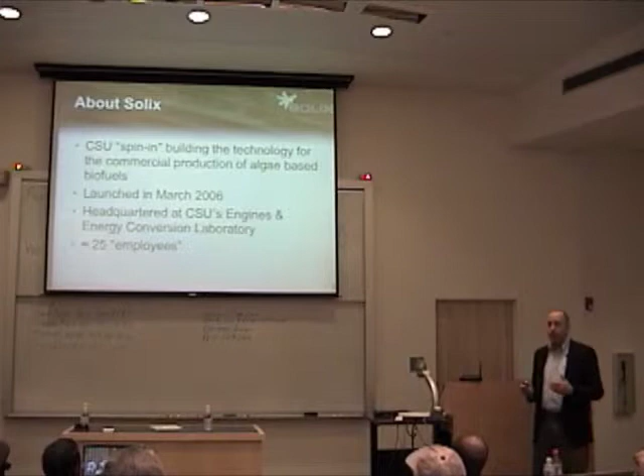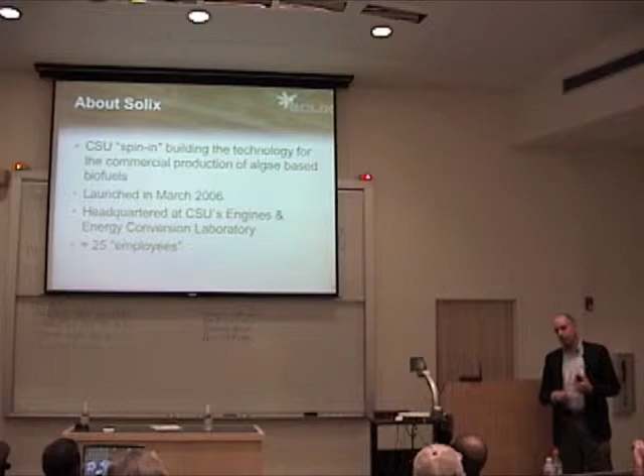A little bit about Solix. March of '06 was essentially when we began our operations. We're a private company, private equity funded. Developed our first generation technology, which I'll show you a picture of, during the course of last summer. And then since September of last year, I've been developing our second generation technology from what we learned.

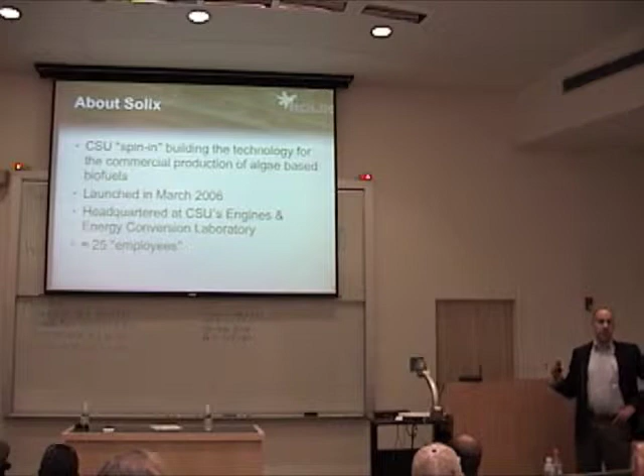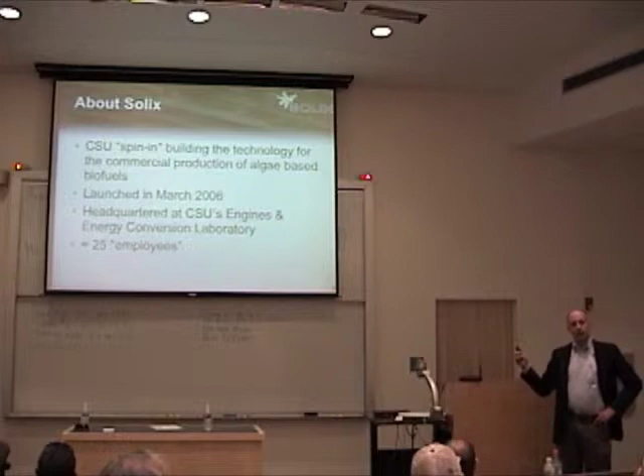We're about 25 people. Half of those are Solix employees, the other half are Colorado State University graduate students, professors, so on and so forth that we've got working on it. We're working in collaboration with CSU out of Bryan Willson's laboratory, the Engines and Energy Conversion Laboratory. Bryan's our Chief Technology Officer.

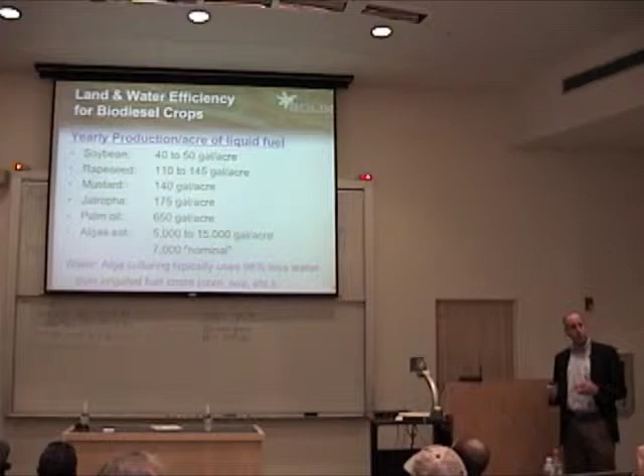Just to bring this up again, because this is more or less the crux, and these are the numbers that everybody throws around. Again, on the algae side, nobody's demonstrated yet anywhere close to these yields, and I think that's an important consideration. The industry holds up a lot of hope, and everybody points to algae. The expectations upon us are enormous, and frankly, those expectations, if we mismanage them, could do a tremendous amount of damage to biodiesel in general. That's something that we definitely don't want to see.

And so, that's why Colorado is such a rich state for us in terms of working out collaborations with some of these other universities, C2B2, working with Matthew and Jonathan, and things like that, all collaborations that we want to establish. But the fact of the matter is that algae does hold out the potential to produce these kinds of yields, and using a lot fewer resources in that production, especially water from the irrigated perspective.

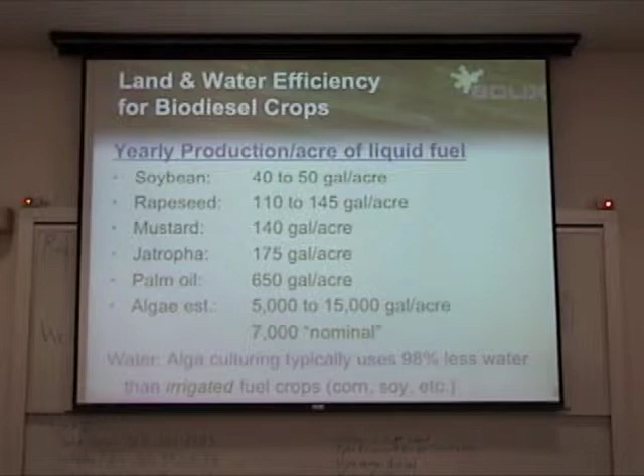And the other one is the issue of land. We don't require arable land, right? We can essentially put ourselves anywhere. We don't need the soil to grow. Matthew went over this, so I'm not going to revisit this program, but this was basically the foundation of our research, more or less, our development. Looking at the open ponds and asking the question, why?

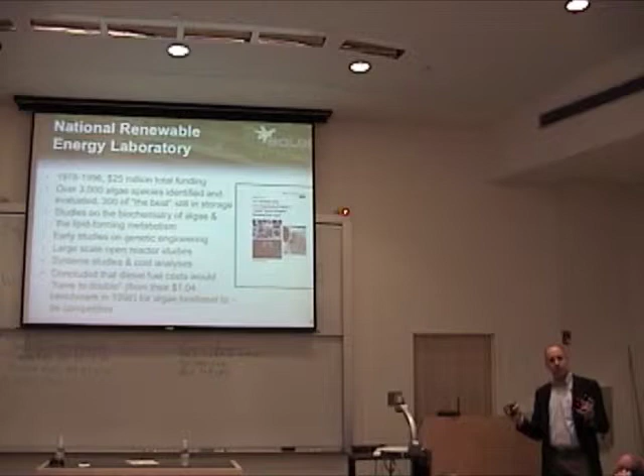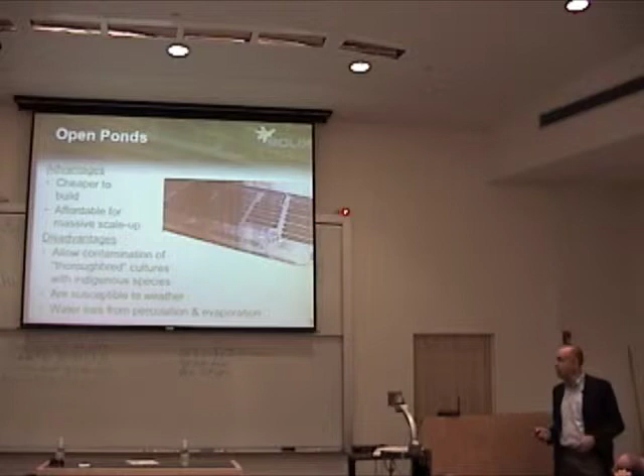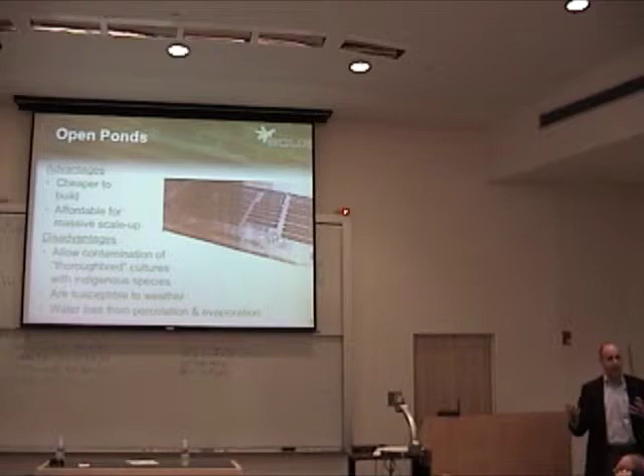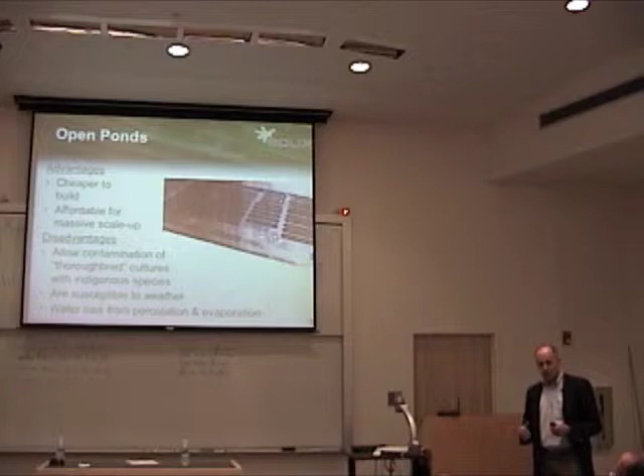So the two schools of thought on the reactor side, more or less, are open ponds and closed reactors. Open ponds, clearly less expensive, but what we've seen is that from a productivity side, they don't yield, they don't give us what we want. The Israelis have done a tremendous amount of work on open ponds. This actually is in Israel, a facility where they produce beta-carotene. Again, that's a high-value product.

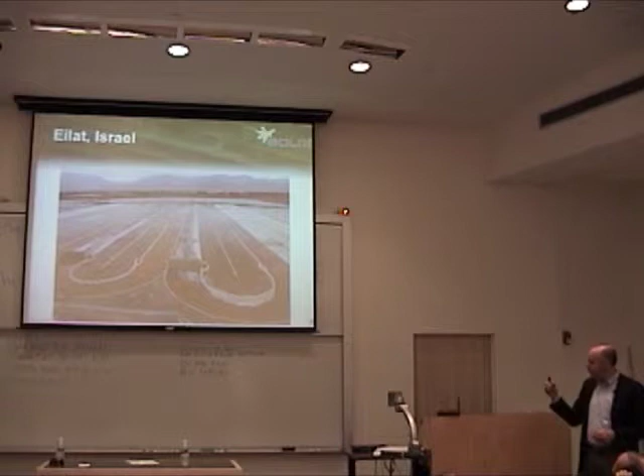And in these ponds, you don't get a lot of productivity, but again, you don't need to if you've got a high-value product. Beta-carotene, I think, sells for something like $1 million a ton, or, on equivalency, $3 million a ton. Something that's ridiculous compared to where we're selling our product, which is roughly around $500 a ton. The Israelis have done a lot of work on this, but what we've seen from a productivity perspective is that, it's an oversimplification to say it's flatline, but we haven't seen tremendous productivity gains on a square meter basis with respect to open ponds.

What they use here basically is, this is the second stage of growth, and it's a little bit difficult to see in the slide, but the algae here are stressed, they're red, that's producing the beta-carotene. They have other growth ponds basically over in this area, and after they grow up the biomass, they transfer them over to these where they stress them and get the beta-carotene.

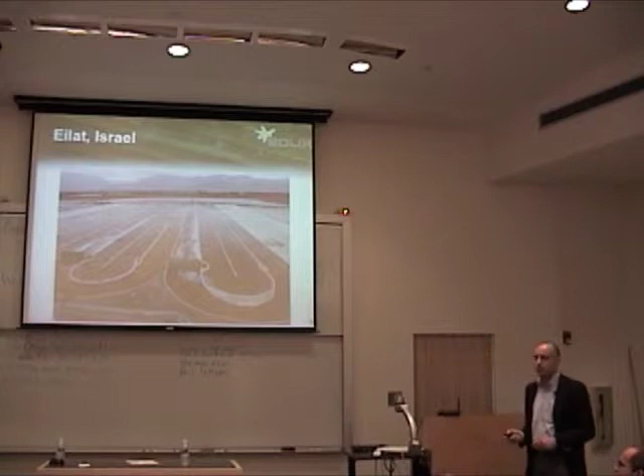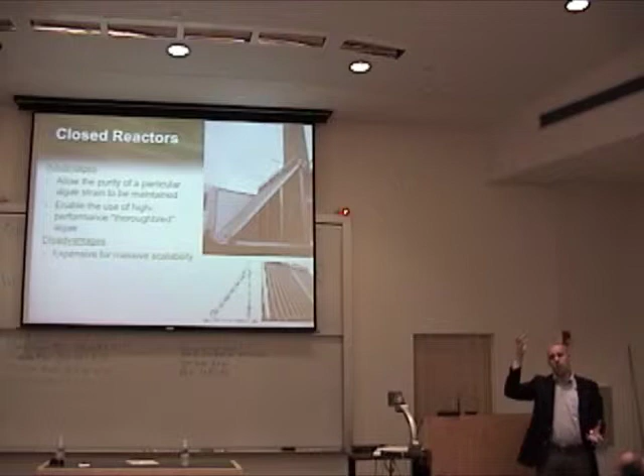The other school, closed reactors. This is a picture of GreenFuel Technologies' early technology. The disadvantage of closed reactors is that you've got a cost issue here. And again, that's the fundamental perspective that you have to address from the commercialization standpoint. Really what we're doing is we're trying to balance two things: productivity against cost. Clearly, the higher productivity you get, the higher cost you can accommodate. But right now, where we talk about that benchmark 10,000 gallons per acre number, nobody's come anywhere close to that.

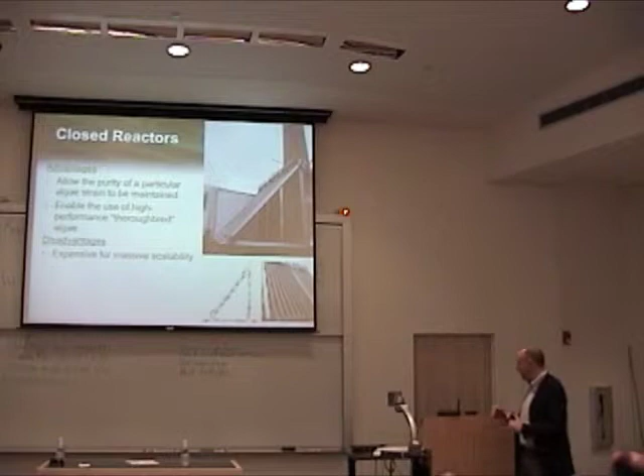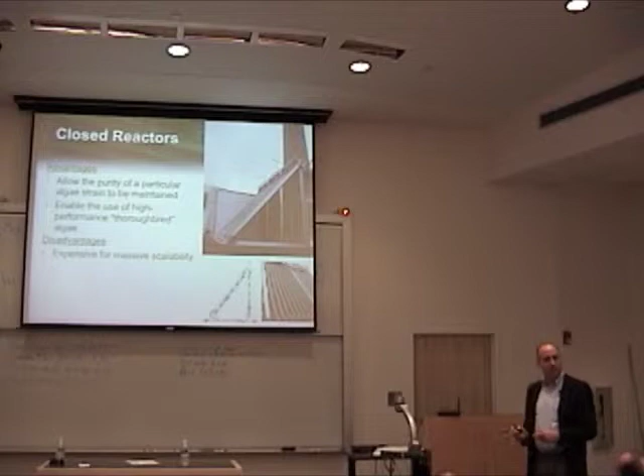What we're trying to do is drive down the cost of the technology so that commercial feasibility is reached at maybe the 4 or 5 or 6,000 gallon an acre number annually. But again, you get better productivity, and where we see more or less proof of this on a production side is looking at some of the companies that have produced nutraceuticals.

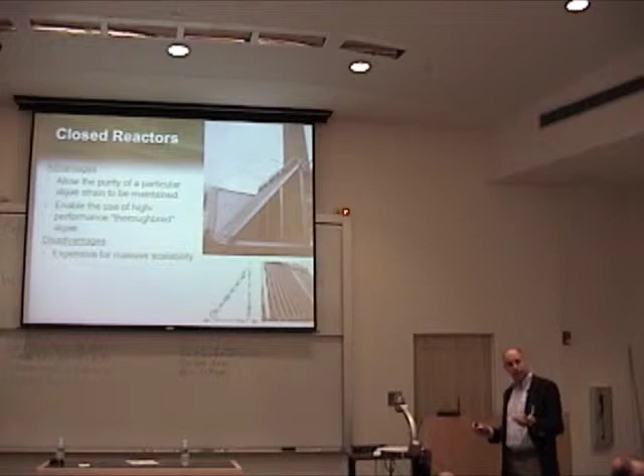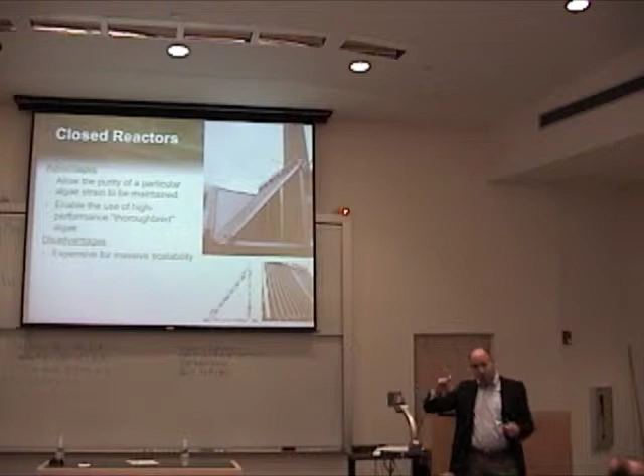At the beginning of their technology, they were roughly at 20 grams per liter, and looking at lipid production, I think they were roughly around 40% lipids, and they've driven that over time through a number of biology and mechanical improvements to 200 grams per liter and 80% lipids.

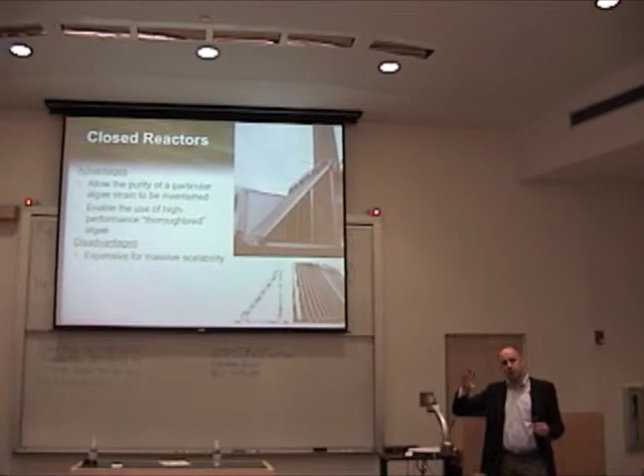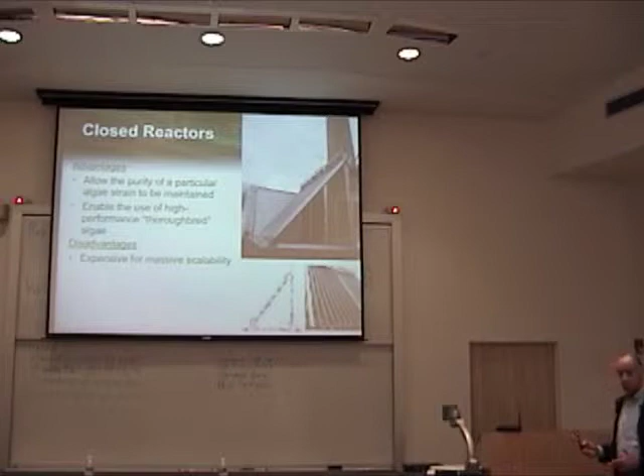Now, there's reasons why from a closed reactor photosynthetic regime, we're not going to necessarily get to those kinds of yields, but I can tell you if we did, we could grow a reactor in this room and probably solve our energy problem nationally. I mean, those are huge, huge numbers, and obviously we'd love to work in that direction.

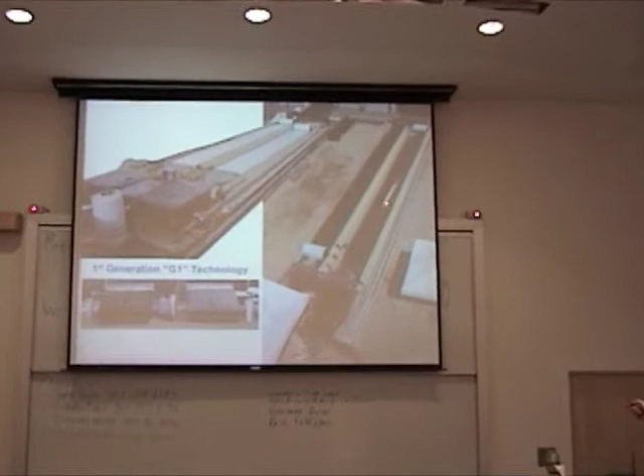This is our first generation technology. It's closed. Those are big bags. This little white thing you see here is a blanket that is actually inside the bag that raises and lowers for providing basically shading from sun when it's necessary and to reduce radiation cooling into the night sky. These are blue rollers that sit on top of the bags and provide peristaltic pumping.

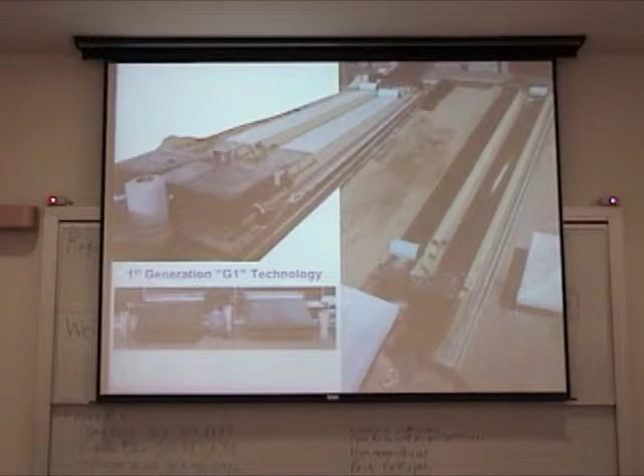One of the things that we learned from this is referred to as a direct sunlight reactor. The best way to characterize a direct sunlight reactor is that the average sunlight radiation that you get on a square meter is roughly 1,000 watts. Well, what we see here is 1,000 watts per square meter because the ratio of surface area to what we call areal area is basically 1-to-1. In other words, we don't have any extra surface area here.

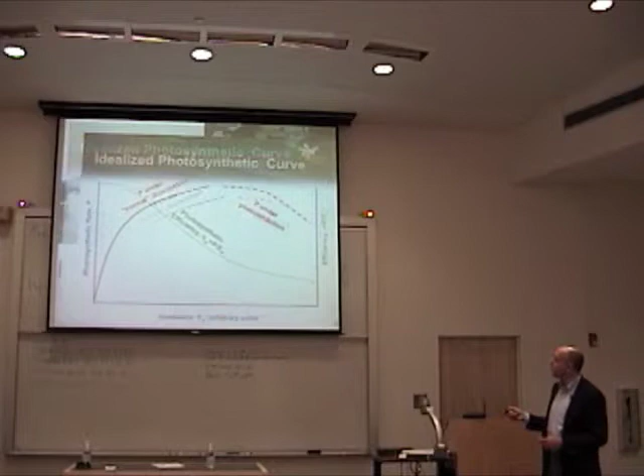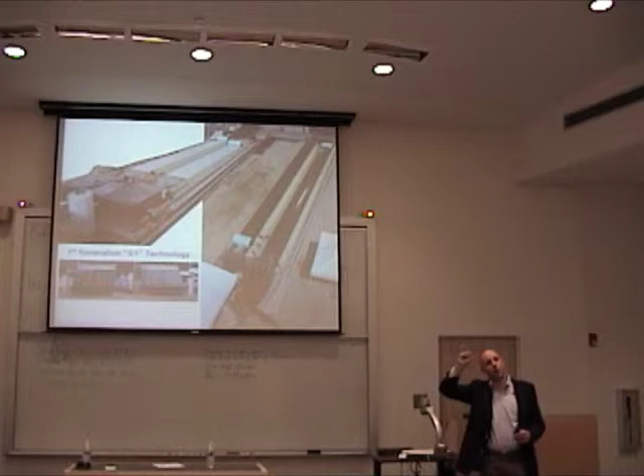So if you look at a reactor like this, again, this initial technology, which is 12 inches deep, there's a lot of energy you have to provide in the middle of the reactor to get the algae up to that photosynthetic active region, that photic zone. And that's a tremendous waste of energy. Again, that drives cost up.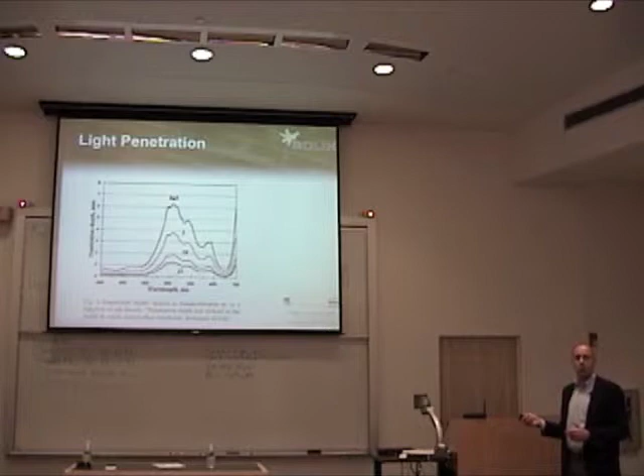So given the photosynthetic efficiency curve and this light penetration, what that suggests is that you want to try and have extended surface area, so you've got more algae using the photons that are available rather than having the algae use more photons, which you can't do. And you want to have more or less a thinner reactor where you don't need as much light penetration, because that's going to reduce your energy requirements.

The first go-arounds at this were basically developed by the Germans and the Israelis. We call them extended surface area or diffuse light reactors, sometimes ultra-high cell density reactors. This is an example of what you see right here. These are basically glass boxes, about 6 feet high, filled with water, and over this surface area of ground, we have an extended illuminated surface area, and that takes advantage of that photosynthetic efficiency curve, or lack thereof.

The problem that you see here, and again, this is where you start getting into a cost issue, is that 6 feet of water provides a tremendous amount of pressure down at the bottom of the box, and so you've got to have thick glass. Again, a cost issue. Right?

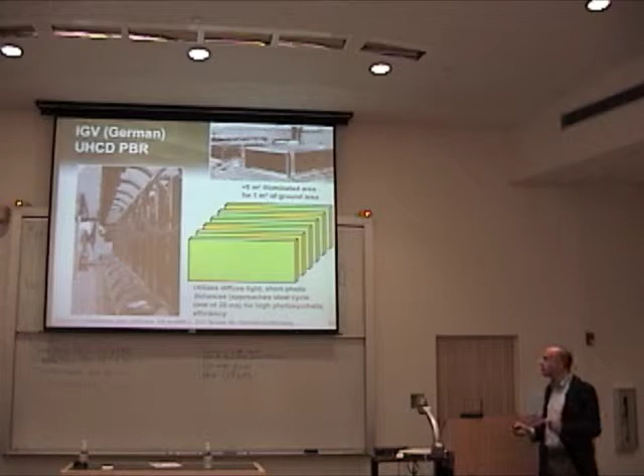Another take at this was IGV. This is actually a reactor that's in eastern Germany, enclosed in a greenhouse. IGV is a former East German company that has formed a strategic partnership with GreenFuel Technologies. GreenFuel is probably held up as the leader in the industry. They certainly raised more capital than anybody. And as far as technology goes, this is the course that they're pursuing.

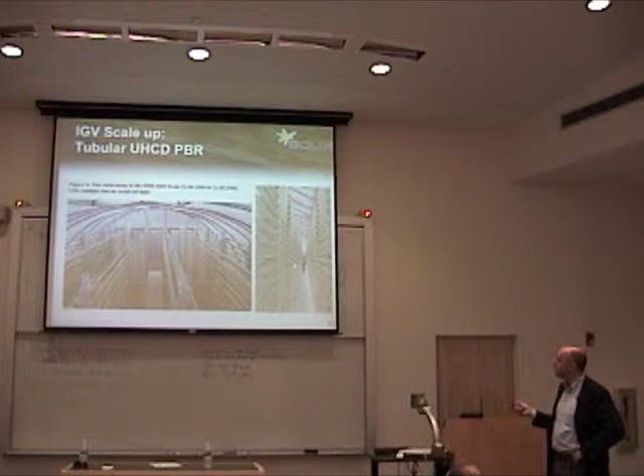You run the economics, and you've got to be able to do it for about 1% of that, right? Somewhere around 40,000. That's roughly $1 per square foot. We think where the economics really have to pan out is around $1 to $2 per square foot, again, depending on where you come out from a productivity perspective.

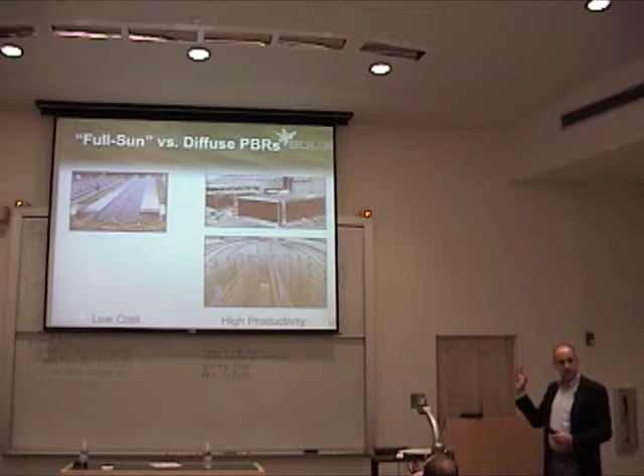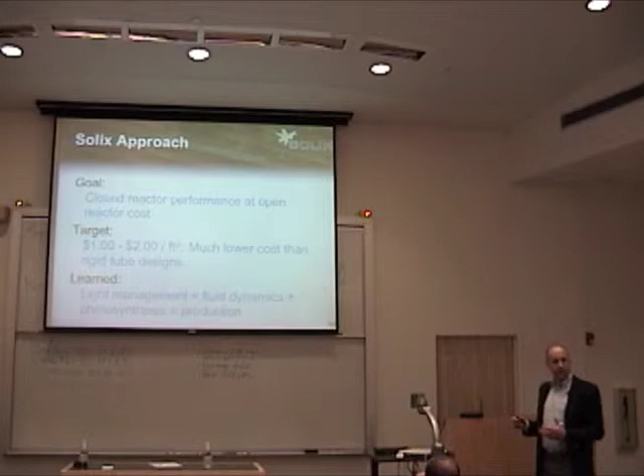So the balance here is one of basically high productivity versus low cost, and how do we bridge that gap? So this was our approach. You've got to be able to provide light management, fluid dynamics to get the algae into that photosynthetically active region. And you've got to honor, obviously, that photosynthetic equation.

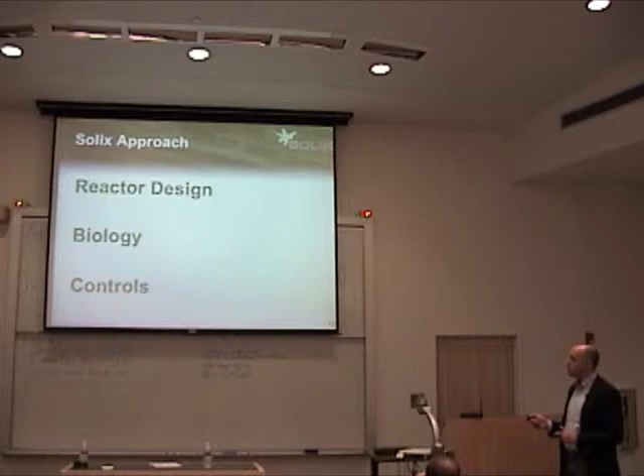And so we've got basically 3 areas that we focus on: reactor design, biology, controls and instrumentation. And the controls and instrumentation are actually a really interesting area that I'll show you a little bit about, and we're just in the initial throes of that.

When we went about our reactor design, again, we were looking at this whole notion of extended surface area. This is just a 1 meter by 1 meter bag that we designed. Indoors, this is what we call one of our Mariner reactors. Every stage of our technology development is named essentially after the different stages of the U.S. space program early on. Our first reactors I'm going to show you a picture of are called Mercury 1 and Mercury 2. Our next stage of development is Gemini.

And there's a reason for that. I don't know if anybody's read Thomas Friedman's book, The World is Flat. In it, he basically identifies renewable energy as an issue that should galvanize the nation, much like the space program did in the '60s when JFK said we should commit ourselves to putting a man on the moon. We've adapted that more or less into our ethos in terms of how we're pursuing this. But we do believe in that.

But this is our Mercury 2. This is our 2nd generation technology. What you see here basically are panels. There are 6 panels in this reactor. This is 20 meters long and about 1 meter wide. The complexity you see at either end is really a function of technology development.

The bags, or the panels, are in a water bath, and that water bath provides a couple of things. One, it provides the shape of the bags, because there is water in the panels where we're growing the algae. That pressure can cause the bags to take a different shape than we want. That water in between allows us to maintain that.

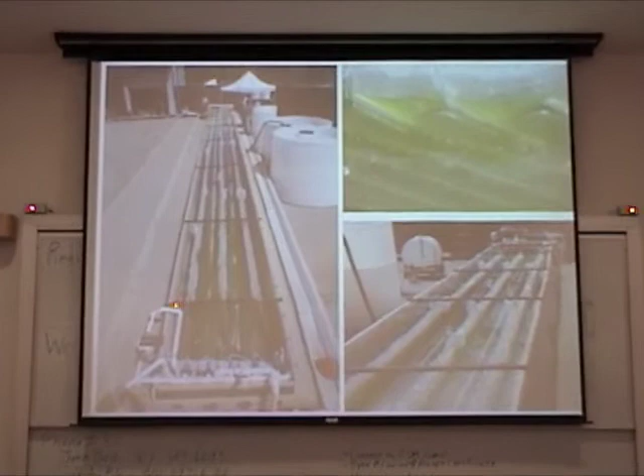The bags are baffled for extended surface area, and it looks like a series of mountain ridges, so to speak. So we basically have 3.5 times the surface area over the surface area of ground, and that's how we're trying to take advantage of that photosynthetic efficiency curve.

In commercial application, the way we envision our reactors is roughly 5 times as long and about 10 or 15 times as wide. The limitations there being kind of the management of fluid dynamics and the weight of the bags.

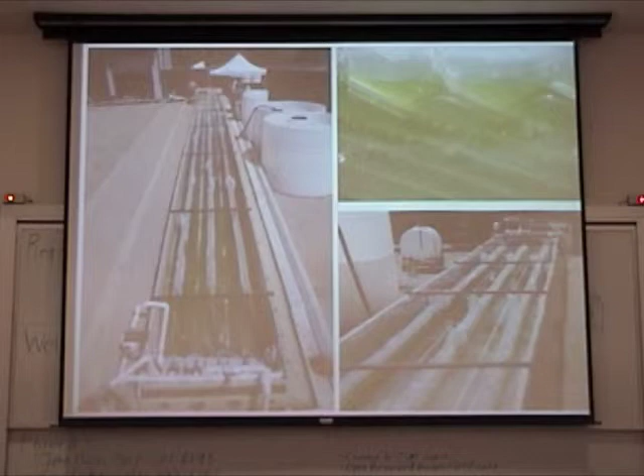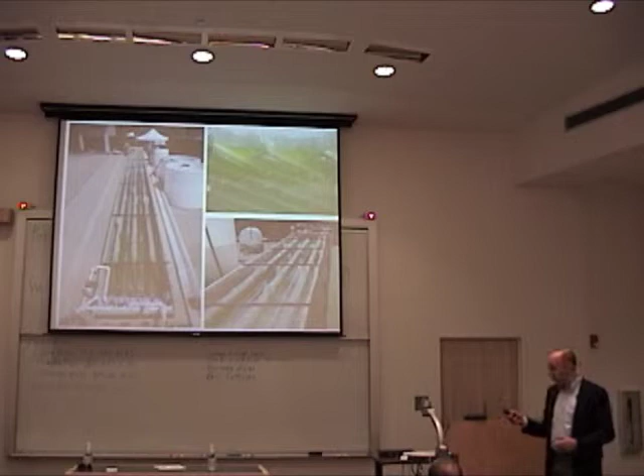This is the second generation polymer plastic film for us as well. That first generation I showed you was roughly a 10 mil polyethylene bag. If you poked your finger through the polyethylene, you could generally do that. This is 5 mils. It's a 5-layer film, so it's about half the thickness. And I challenge anybody in this room to get your finger through this. It's really pretty tough. It's really neat polymer.

We're working with a large plastics manufacturer on the mass production of these bags. We manufactured these bags ourselves by hand, and we just recently automated the process. So what used to take roughly 60 hours to produce a bag now takes about an hour.

We have a great team of engineers, and that's the other aspect of our approach. Of those 2 domains, mechanical engineering and biology, most of the people in the industry are coming at this from the biology domain and trying to find that right species. We're really tackling this from the mechanical engineering domain. The species we clearly need to find, but if you don't have the production system, what's the sense, right? You can't get there no matter what you do.

Our biology program is headed up by Dr. Anna Ettinger, who came out of biotech, who has domain experience in algae. They're extremely hard to find, but she has done a great job and has tremendous knowledge of biology.

And again, I think for Solix and for the C2B2 universities in the state, the future is held in collaboration on a lot of this. But our focus in biology right now is screening for various species. The species that I showed you in this reactor is not the species that we think we'll use in commercial production of lipids.

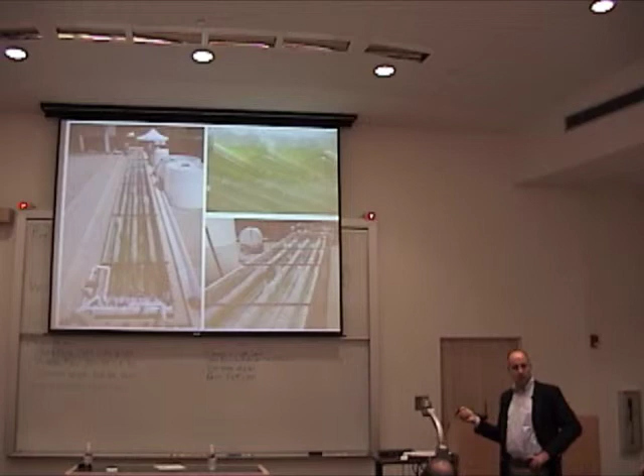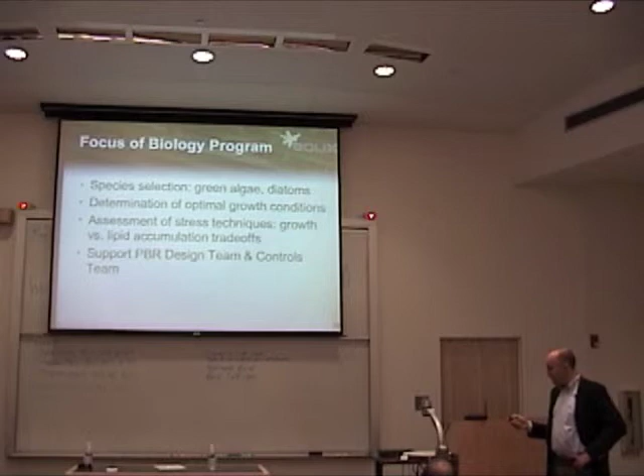This is a very robust model for us that has helped us inform this mechanical design. So right now what they're doing is screening. They're working on assessments, various assessments for lipid production, and as I said, supporting that mechanical team.

An example of where that integration comes is looking at something just as simple as moving the algae around in the reactor. What you see here is a function both of cell density and output rate. And this output rate is really what we're looking for. If you saw in Matthew's presentation, he cited a couple of numbers. 50 grams per meter squared per day was the peak output that NREL achieved. Well, that times your lipid yield gives you your commercial productivity, essentially. You multiply that over your surface area. But those are all fixed.

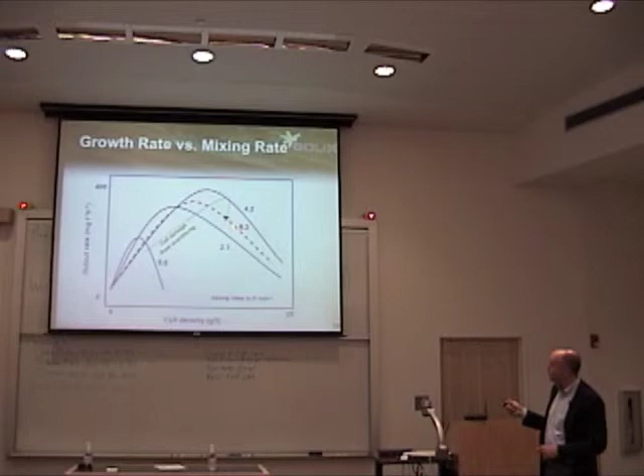So if you look, really what we're trying to do here is maximize this output rate. This is a function of mixing these different curves. You see, as you go up from roughly 4.2 liters per liter per minute in terms of mixing to 6.3, you essentially are stressing the algae. You suffer cell damage. So what we did to basically detect, again on the biology side, where we are with this, is we designed these little chambers.

This chamber is roughly the size of this water bottle. And we have these lined up in a stress reactor, and we cycle the algae through these chambers. There's a little ring in here, this disc, a cylinder, that spins inside the cylinder at different rates and creates the shears. Again, marrying up the biology and mechanical engineering aspects of this.

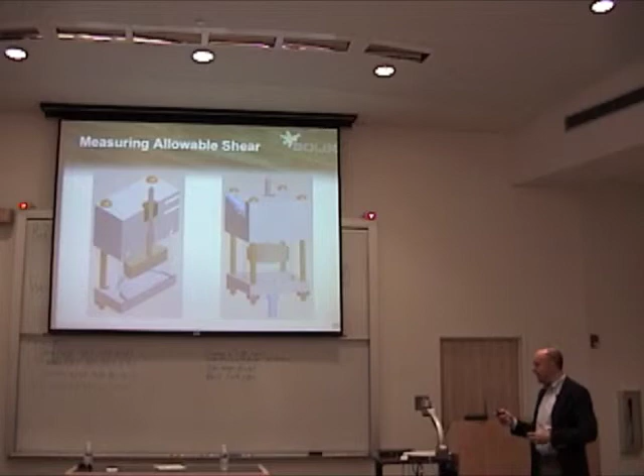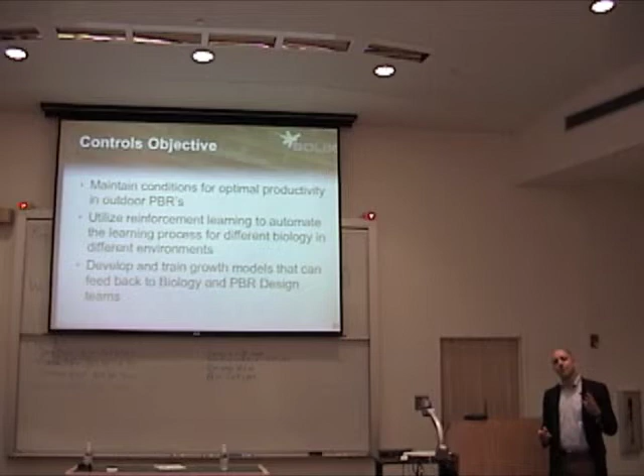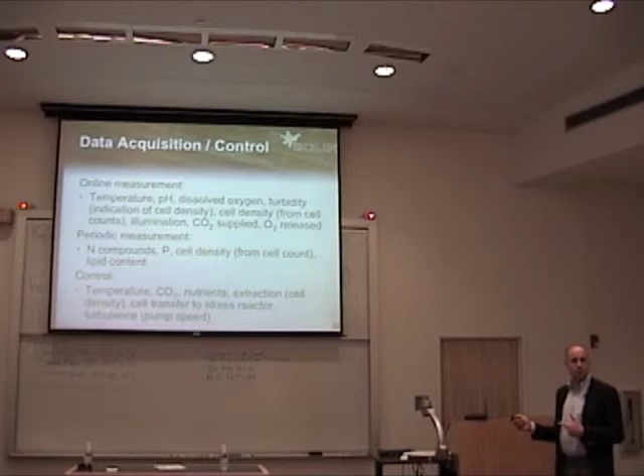The third objective I mentioned, controls, for optimizing this production and the yield. Looking at a relatively new area in terms of controls, trying to understand biological systems, reinforcement, self-adaptive learning on the reactor, so on and so forth. The other elements of controls and instrumentation are data acquisition. And so looking at all the things that we need to take a look at, pH, salinity, temperature, dissolved oxygen.

And this is a great example. This information here on this graph is a great illustration of the opportunity for controls and instrumentation. What you see here is basically full sunlight, 40% sunlight, and so on. Again, cell density and output. Clearly, at full sunlight, we want to maximize our output. And so as you go to greater cell densities, because of cell shading and things like that, effectively what you get is lower output.

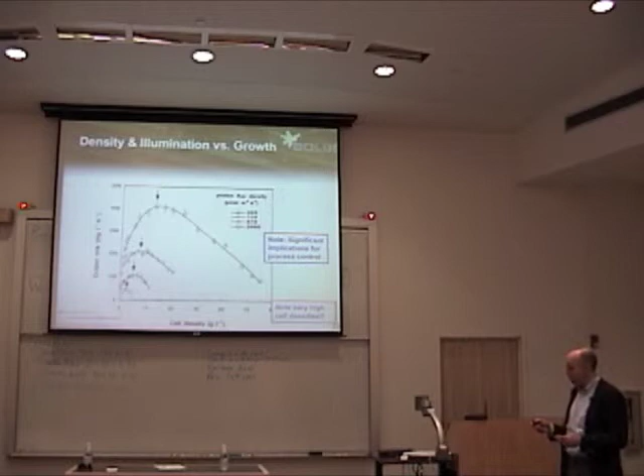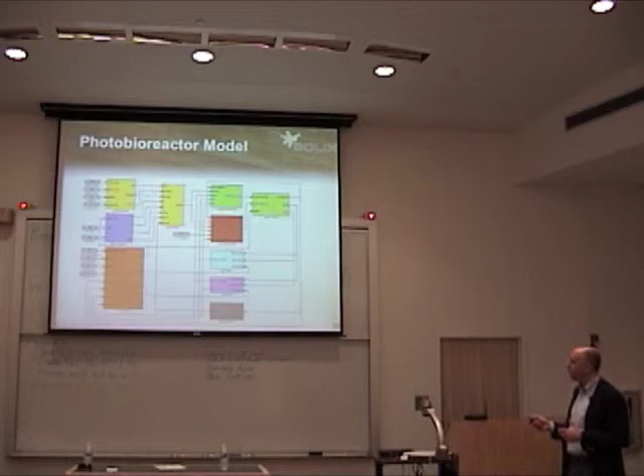Now, it might be sufficient to have production here, again, depending on what your lipid yields are, but the fact of the matter is, just looking at these, your first intuition tells you you kind of want to operate up here. Well, that's a function of how much sunlight is available, how much shading they're getting, how much mixing we have to do, pH, and so on and so forth. So this is a great illustration of that. This is the model that we're building on the control side, trying to understand light and light angle and transport and cell growth and so on and so forth.

Inside, what we've just recently installed is a solar simulator. When we go inside to do our research, generally all you have available to you is fluorescent lighting, which is roughly 20% sunlight. This solar simulator actually puts out 1,000 watts per meter squared. What we're doing right now is building a grow room, for lack of a better term, so we can do some high throughput screening of various species and do some testing on toxicity, different media conditions, and so on and so forth.

This actually was sitting in the closet at CSU. They used it for photovoltaic research, and it's a great example of where our collaboration with the university is helping out.

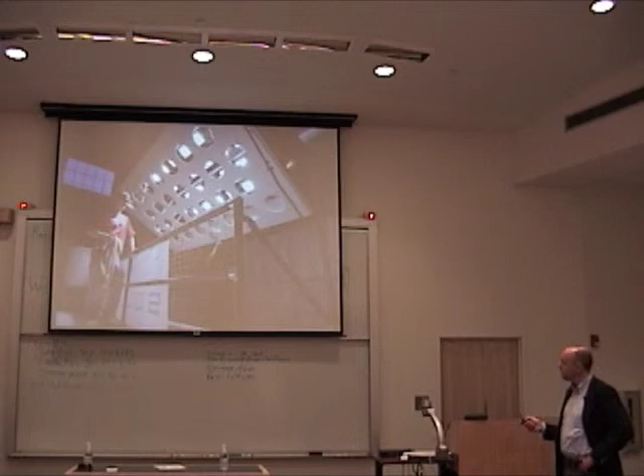This is my last slide. It's more or less just a concept, an artist's rendering, of what we're shooting for. Coal-fired power plant, cement plant, whatever, ethanol plant. Putting out CO2, NOx. Capturing those gases and running them through the reactor. The one thing that you'll notice from this is that one of the constraints we have is that we need land, right? We need land and we need sun. And that's obvious. And, frankly, that's a function of photosynthesis, and I don't think we'll ever get around that.

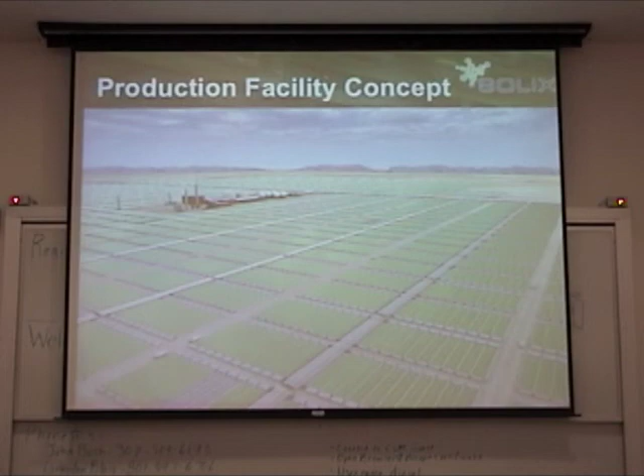What we'll do to limit the amount of land we need is drive up our productivities to the extent that we can. So this is what we're shooting for. Industry is tremendously interested in this. We're having conversations now. Clearly, we're not in a position where we want to roll out the technology on any commercial scale, because there's both commercial risk and there's technology risk. There's some other problems that have to be solved.

However, in the short term, is this a CO2 solution? It's possible. And that's one of the things that I think industry in the short term is certainly looking at. But again, that's more or less our vision, and that's what we want to collaborate